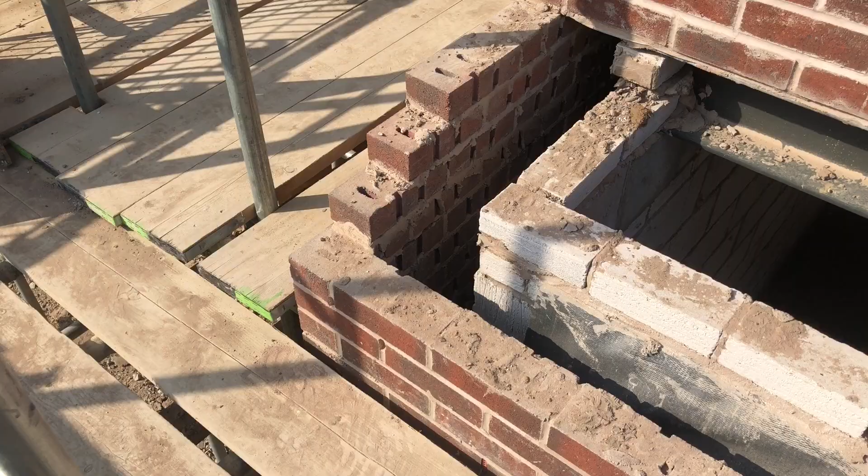Just do a quick video explaining step trays. So this is the start of your step preformed plastic tray, I've already done.

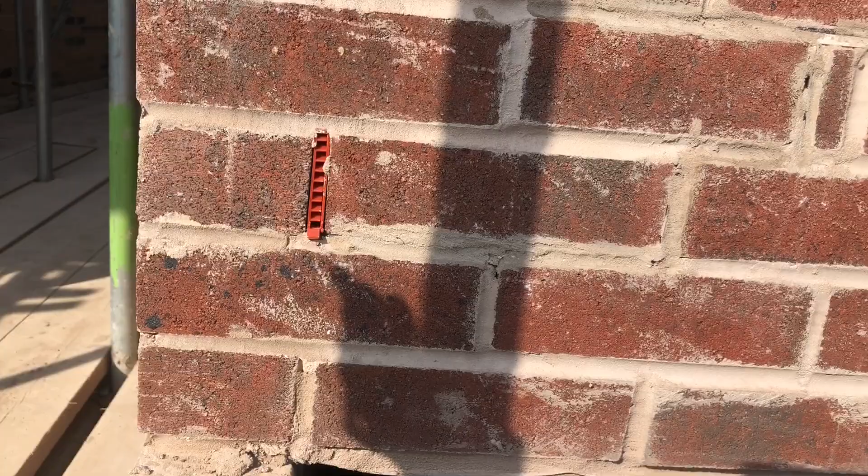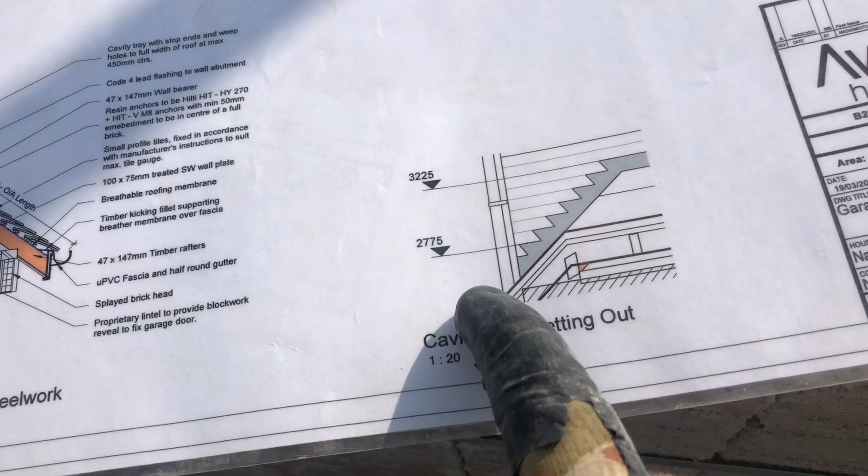Now I got that measurement, get given a drawing like this, and that highlights where your first plastic tray goes. Your lead laps into the plastic, so you can see there's the lead will have a spill, but you want a weep hole right where that lead is. You can put one below if you want, but I put one right where it's marked, just to show that's where I've started my tray, where it's specified. This is where they want the trays up to, 450. That's the difference between the measurement.

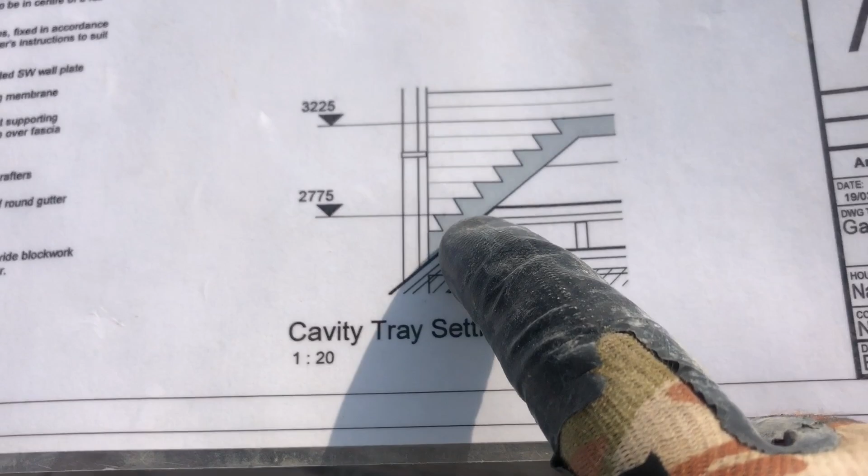So now I'll show you how you find the degree. For this particular roof, it's 45 degrees. The only reason I know this, it would normally tell you right here, it would normally say 45, but I know that's a 90 degree angle, and half of that is 45. Same here again, 90 degree angle, half of that 45. So that's where that is. Right, give you guys a little idea.

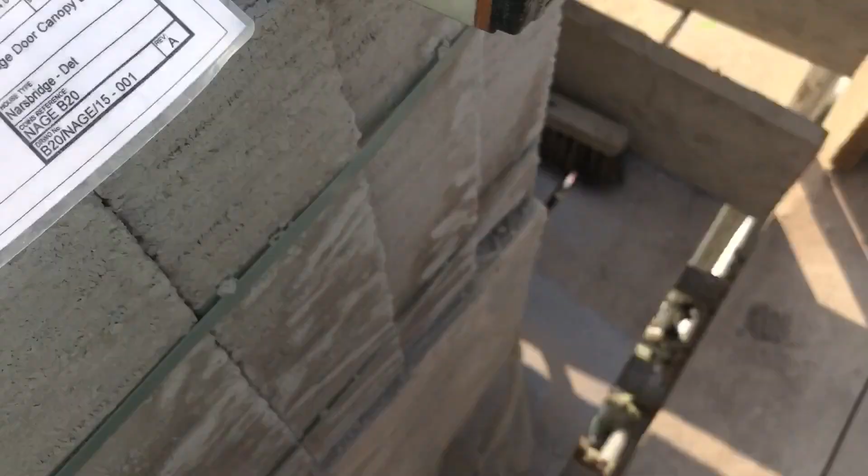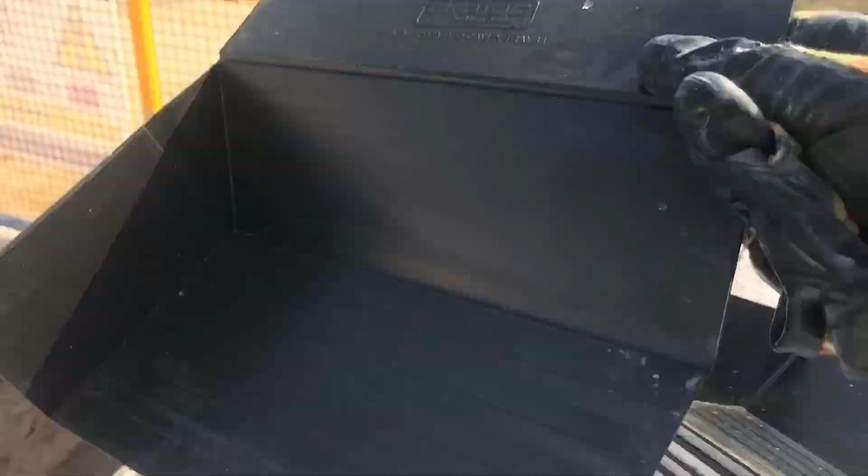And then now I found that placement. When your first tray goes in, brick on top of the tray, and then you have little marks when you're 45 degrees. So here, I'll grab you a preformed tray, show you one. And these marks here marry up, so 45 degrees is there.

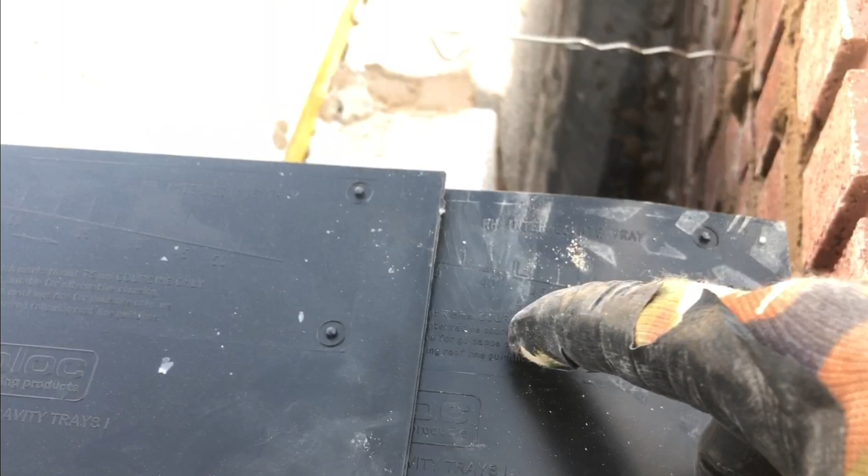So I'll just stop here and show you guys that where these trays are lapped, as you can see where the plastic laps to the other plastic, there's a little gauge, little degree marks, and I'm lapping that to the 45 degree mark. If you didn't see it clearly in the video, I know I was a little bit quick in this sort of situation video, but as you can see, them little marks on the top side of the tray have the degrees on them. So if it's a 45 degree roof, you lap them to the 45 degree mark. If it's a 30 degree roof, you lap it to the 30 degree mark, and etc, etc.

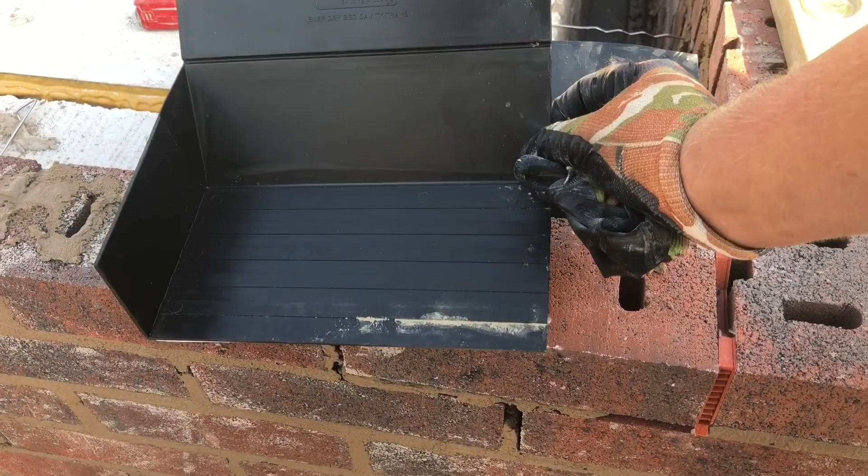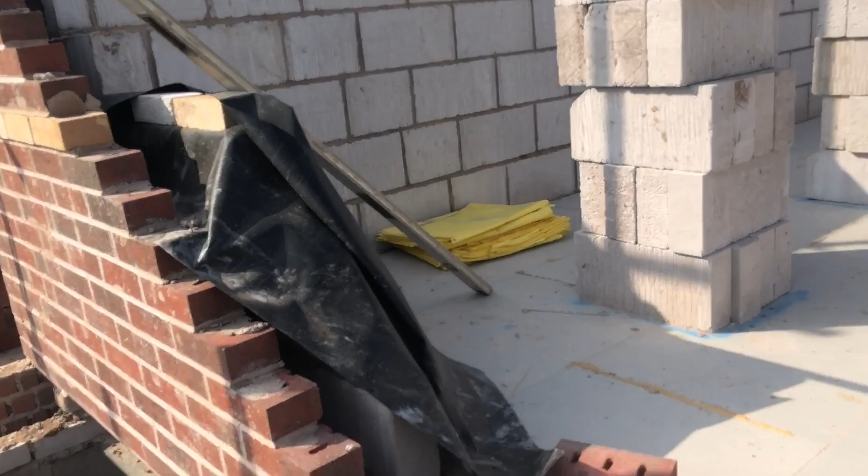So this is just me explaining that a little bit more. I've got to marry that tray up to there. So when I stand that up, that's my 45 degree, and that every course all the way up until the specified height. Plastic bit of damp, plastic damp. You can sometimes get solid damp trays like that, but plastic damp tray across, you know, normal damp, to finish.

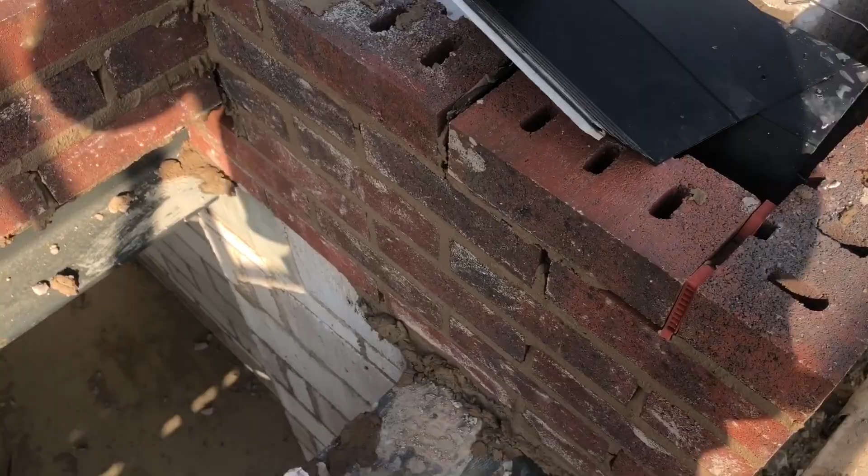So you just follow your 45 degree marks, cut your bricks obviously to suit the tray, but it has to stay bond, so that's where I've started my tray there. The lead may well come over to here and cloak down, so cloak down, and then same again, lead comes in, cloaks, sort of thing. But your roofer will explain that if you want to know that.

That's pretty self-explanatory there. I'll do a more in-depth video, but this is just a little short one to give you an idea. So I'll show you when they're done.

I like to point my trays as well. I like to point them all up so the roofer can come put his lead wherever he feels he must. So if you get your trays at a slightly wrong height, they can put that lead in and no one will know any different.

So I hope that video helped. This was when I did that tray, so this was last week sometime when I first did these trays. But as you can see, when I get up to the tray, obviously the lap is to whatever the degree is, and you can see I cut the brick.

Obviously I still remain with my bond, but I cut the brick up to the tray, and then the off-cut, a little piece, I put the other side of the tray, that obviously with the two cuts it still makes the same length as a full brick. So that's how you keep your bond the whole way around.

So obviously there is times where, obviously you can see here, I put a brick up to this tray, but it might have been not quite a brick, so I had to cut a little piece, and then I had to cut another little piece to make up my half bond, obviously on a corner. That obviously can happen. So the little 3/4 and the little piece made up the bond, obviously. It's hard to see on a picture sometimes because it distorts.

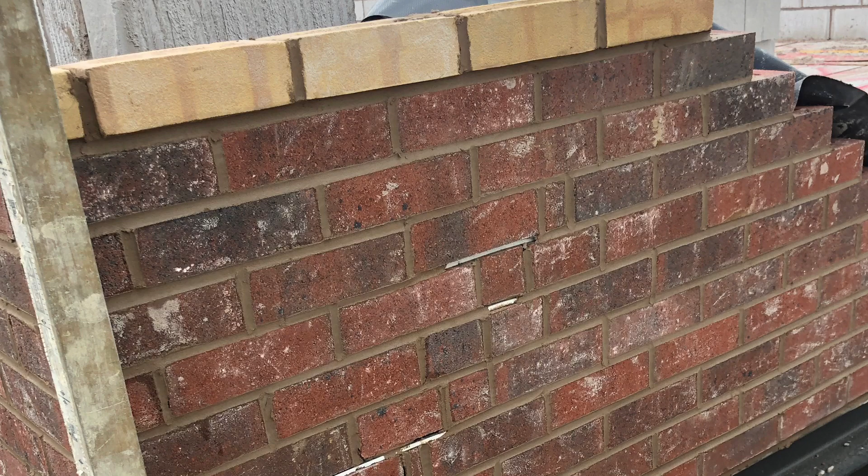I don't like to put any weep holes at the top where I've cloaked my damp across, because obviously that's what your trays are for. Your water should run down, and then the weep holes should be at the bottom to catch the tray. You don't need any, well, you shouldn't need any really on your top tray. I might do on the front, I might put some in at the front, but to be honest, they aren't needed really.

You can put them in, some places will want them in, some places won't. I haven't put them in on the back of this house, but I will put them in on the front, because obviously it's up to a terracotta brick, so you can do it. I'm going to do it just for the sake of, but it isn't always needed.